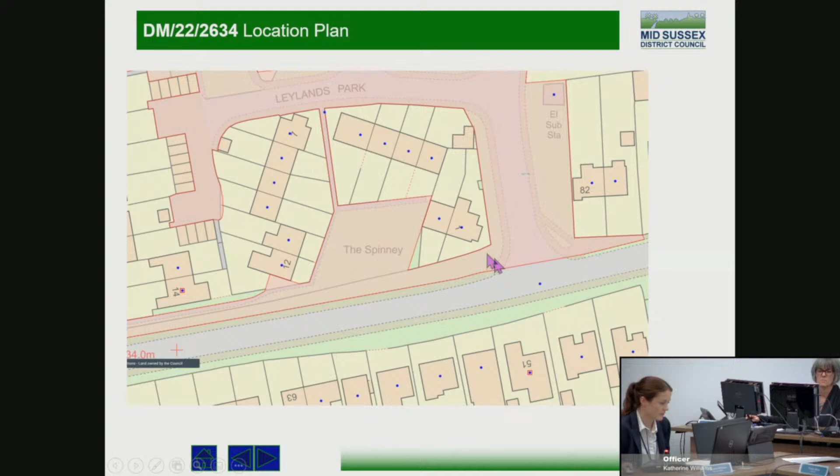Highways have been consulted on the application and raised no objection on highway safety grounds, and following the submission of an additional amended tree protection plan, the council's tree officer also raises no objection, subject to a condition to ensure that the tree protection measures during the works are carried out to protect the trees.

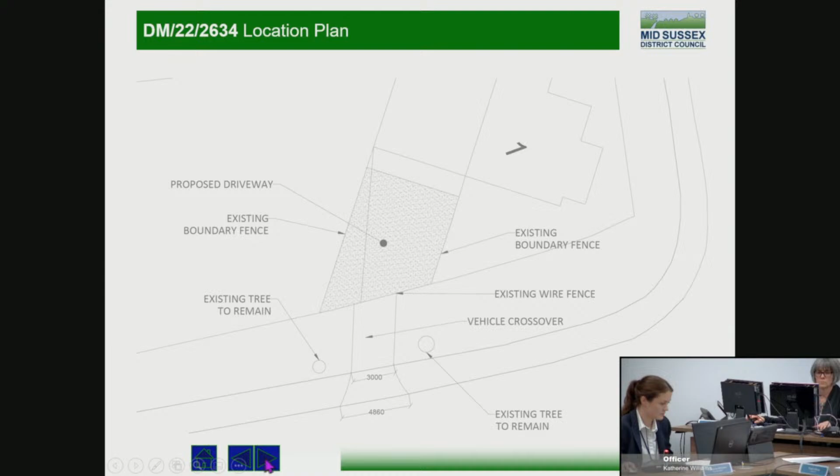The proposal is considered to be in keeping with the established character of Leylands Road and would not detract from the open character of the open space of the spinney, and is considered acceptable in terms of highway safety and trees, and would not cause harm to the amenities of neighbouring properties. Officers consider that the proposal is in accordance with the development plan and is recommended for approval. Thank you, Chairman.

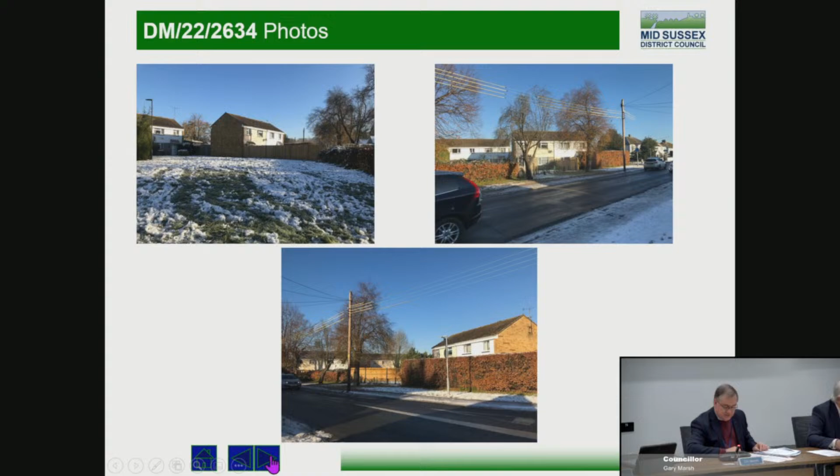As the officers just suggested, the only reason it's here is because it crosses our land. Do members wish to debate it, or should we go straight to the... So can I ask for a proposer?

Councillor Sweatman and Councillor Coote. Oh, hang on a second. I better ask somebody from Burgess Hill, it's only fair. Councillor Eggleston, do you wish to second it?

Yes, Chairman. Me? I'm happy to second. Okay, so Councillor Sweatman to propose, Councillor Eggleston to second it. Can we go to the voter screen, please? Thank you.

Thank you. That is a full house of 9, so that has been approved. Thank you, Katherine.

All right, item 6 on the agenda is for refusal. It's pages 21, and it is DM 213898, 3 to 15, the Broadway, Haywards Heath.

That's just, as we all know, the square roundabout or one-way system. And this is Mr. King's. We've got no public speakers, so Mr. King, it's all yours.

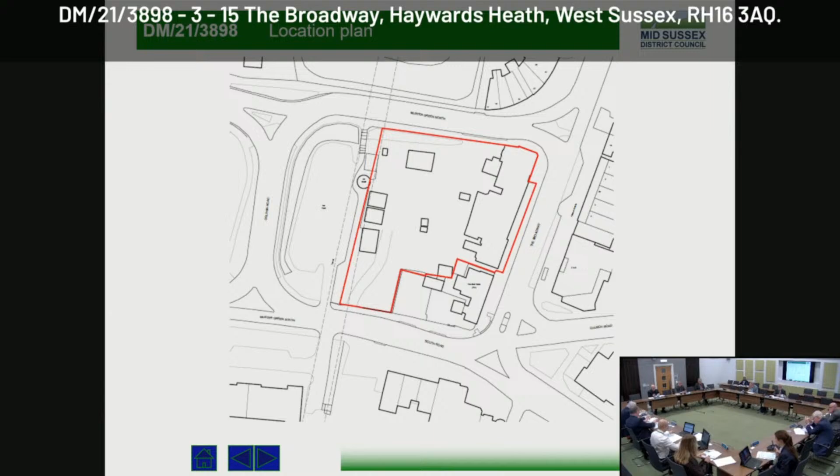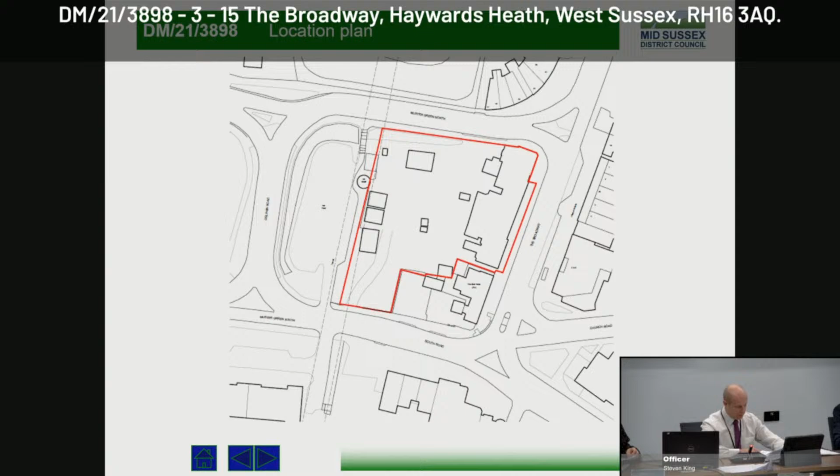Yeah, thank you, Chairman. Just before I go through the application, I'll draw members' attention to the update sheet. You'll see that we've had additional comments from the Council's tree officer on the revised proposals and landscaping plans, set out in the update sheet. Following on from those revised comments, I've added a further section to the report regarding trees, which again you can read on the update sheet, and that results in a further reason for refusal recommended relating to trees. So those are the updates, Chairman.

Thank you. So to go through the planning application, the application seeks planning permission for the demolition of all of the existing buildings within the site and their replacement with a new building to provide 37 units of retirement living accommodation and commercial floor space on the ground floor facing onto the Broadway.

So this is the application site here, outlined in red. It's 3 to 15 Broadway, within the town centre of Haywards Heath, and it's also part of the secondary shopping frontage along the frontage here. The existing buildings along the front are a parade of Victorian properties. The rear of the site is a mixture, quite a bit of hard standing, a number of outbuildings within the site. The existing vehicular access point is down here in the southwestern corner, and the site is bounded by the one-way system, so it's a one-way gyratory around the application site.

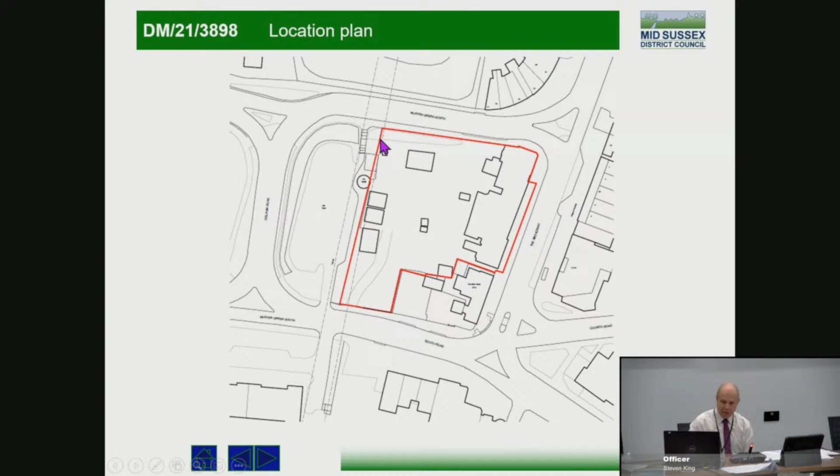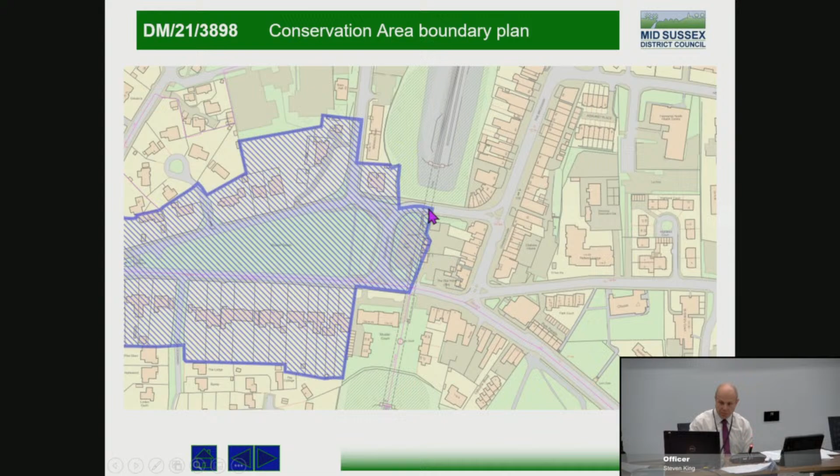The western boundary also marks the boundary of the conservation area, as shown in this plan. So this is the application site here, and the hatched area is the Muster Green conservation area, so it washes over the car park and runs along the western boundary of the site.

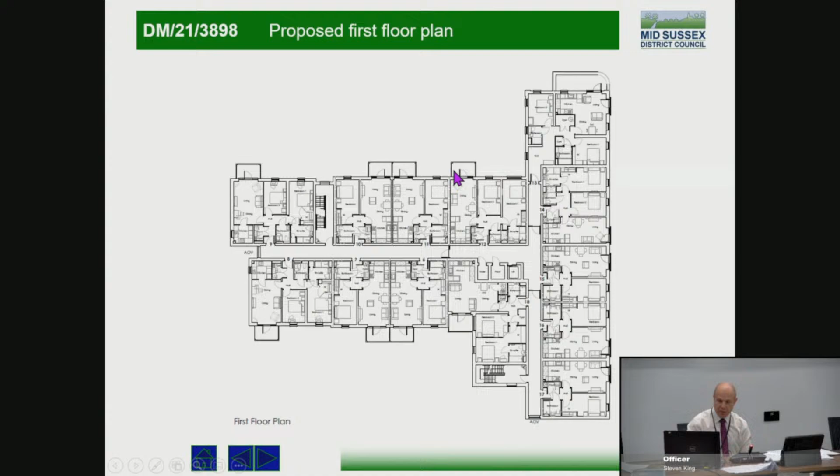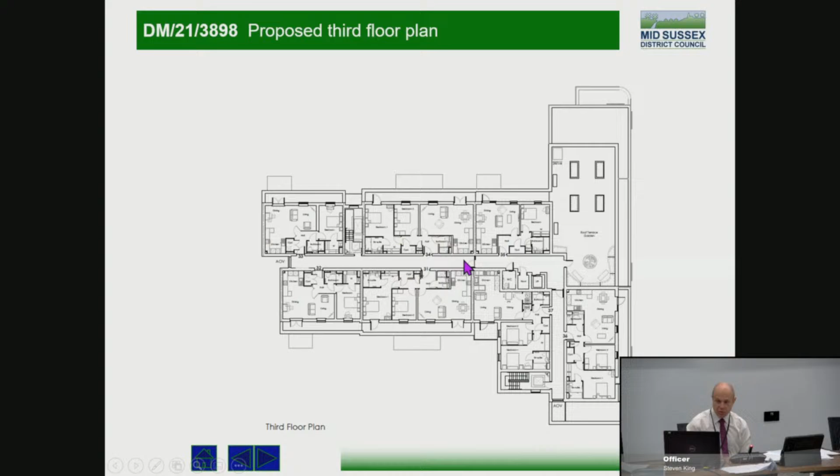First floor plan, it's all residential accommodation accessed off the corridor, with a number of balconies for the properties. And finally, the final floor, the third floor, is slightly set back, as we'll see from the elevations, but has the same sort of layout - central corridor, residential accommodation located off that.

In terms of the elevations, this is the northern elevation from Muster Green North, so you can see ground level is lower than the application site, so that's the pedestrian stairs I referred to on the northern side, and that's the proposed building - brick, and then cladding for the upper floor setback.

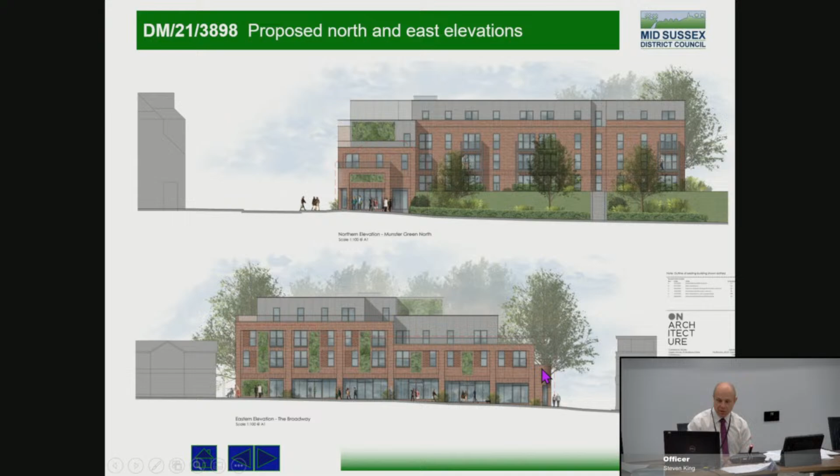This is the eastern elevation onto the Broadway, so you've got the commercial units on the ground floor, the residential above, again the upper floor setback, and then it's stepping right down, turning the corner on the northeast side of the building.

Proposed southern elevation to Muster Green South, and then the western elevation to the council car park.

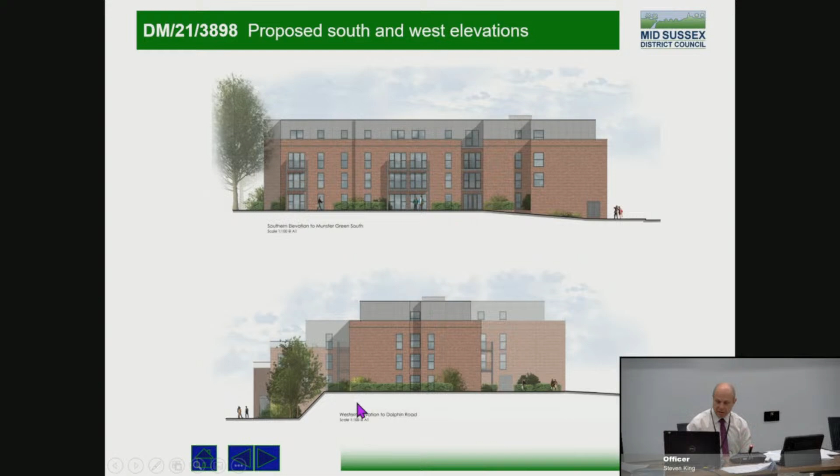Just some 3D images to give a better flavour of the application. So that's looking at it from the Broadway - commercial on the ground floor with the residential above.

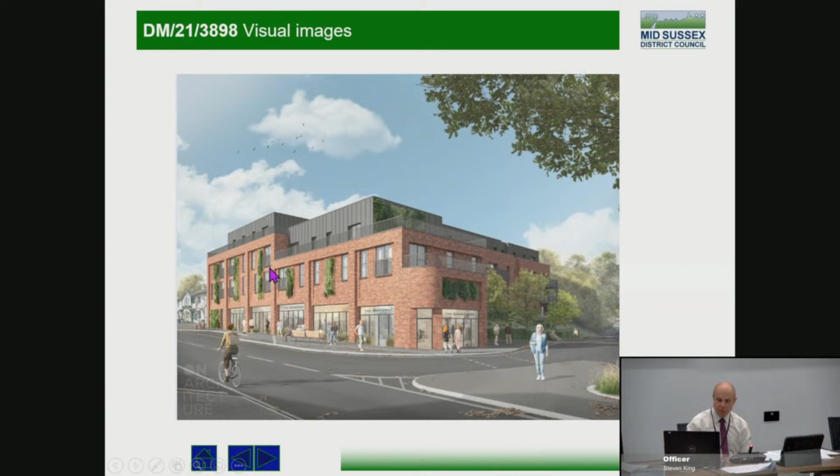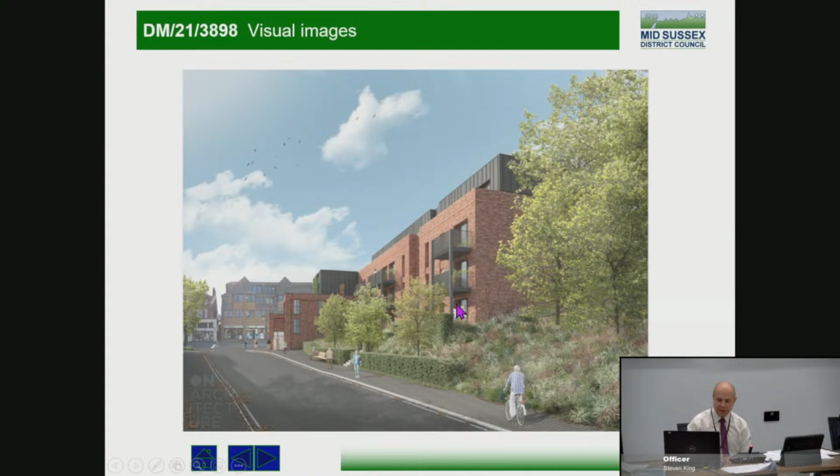And that's looking from Muster Green north across to the Broadway, so again the site, or the road, at a lower level than the site, the building at the higher level, with steps up to it.

Various views from the site from the Broadway, so that's as it is at the moment - the terrace with the shops below, Star Public House on the corner, which is outside the application site.

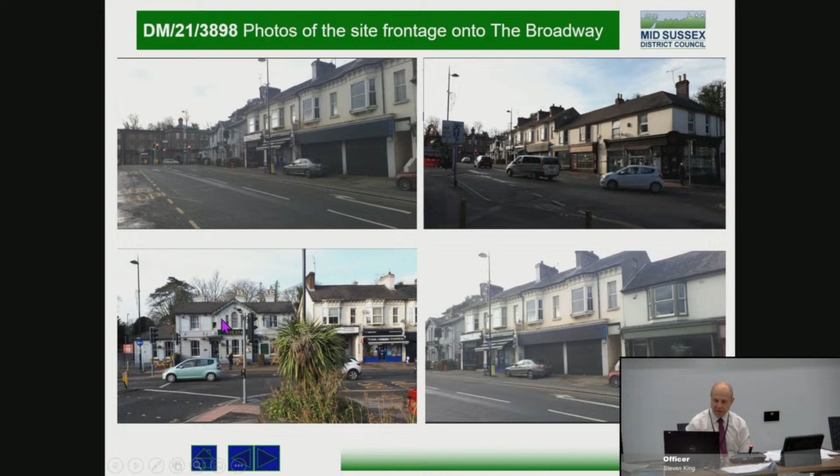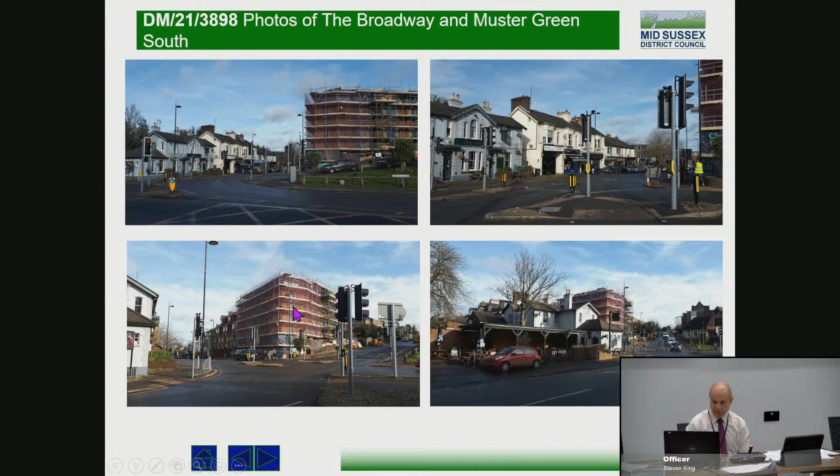Views from Muster Green South, so that's the entrance into the council car park, that's the boundary of the site, and that's the existing access into the site.

That's a view from within the site looking out, so they're the buildings opposite on the western side. That's looking back up to the site.

Views from the south, looking into the site, so you can see it at the higher level, and again much higher level, the application site. So these are the buildings that would be demolished.

And then finally just some wider views from across the Muster Green conservation area, so the application site behind the trees here and behind the council car park.

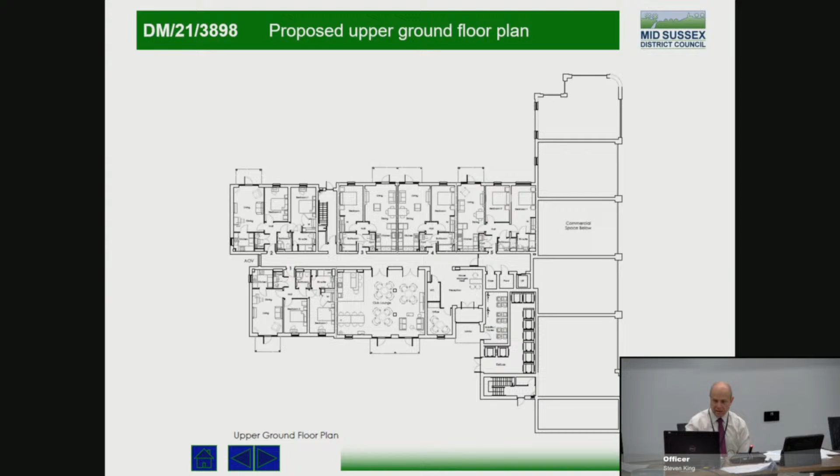So if I just go back to the layout, just to go through the issues briefly. In terms of the principle of the development, that's dealt with on page 34 of the committee report.

There's no objection in officers' view to the principle of this type of development in the town centre. There's a clear need for this type of accommodation for the elderly, which is supported by national policy and the development plan, and there's nothing in either that precludes this type of accommodation in town centre locations. So as a matter of principle, we think that's acceptable.

Likewise, the commercial uses on the ground floor, as a matter of principle, that's clearly acceptable as this is a town centre location. Key issue on this application is the design of the scheme.

That's dealt with on page 38 of the report, and as members will be aware, good design is sought by national policy and under our own policies. The existing buildings on the frontage do contribute to the character of the area, and so in order to justify their loss, it's your officer's view that the scheme really does have to be of a high quality.

And you'll see in the report that the urban designer and the design review panel were critical of the scheme and have a number of concerns about it. Your officers, for the reasons set out in the report, agree with those concerns.

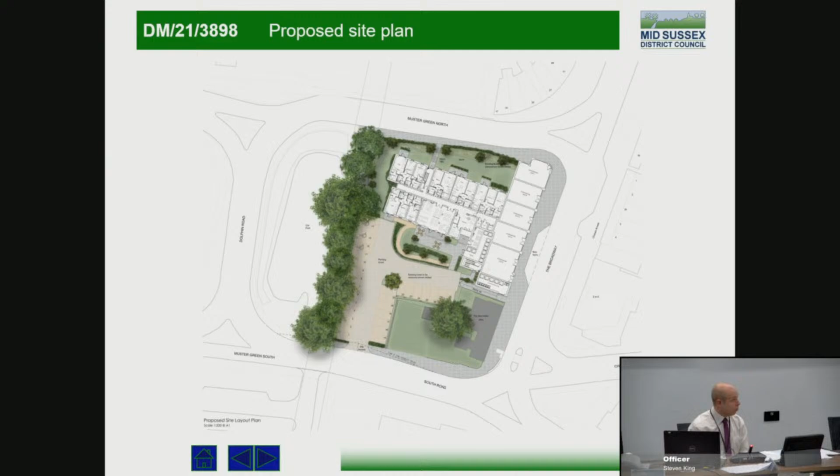So for the reasons highlighted in the committee report and on the update sheet, we feel that the application can't be supported, Chairman.

Thank you, Stephen. We've got nobody who's public speakers, so do members wish to debate?

Nope. Move to refuse on the officer's comments. And also in the update sheet, the third reason is by the tree officer. It's on the back page and it's contrary to DP 37. So, I would propose, can I have a seconder, please? Councillor Phillips? And can you now go to the vote, please?

Very poorly done. Yeah. Right, that's unanimous. Thank you very much. That has been refused with the additional reason in the update sheet. Thank you very much.

Item 7 is questions pursuant to Council Procedure Rule 10.2, which notice has been given.